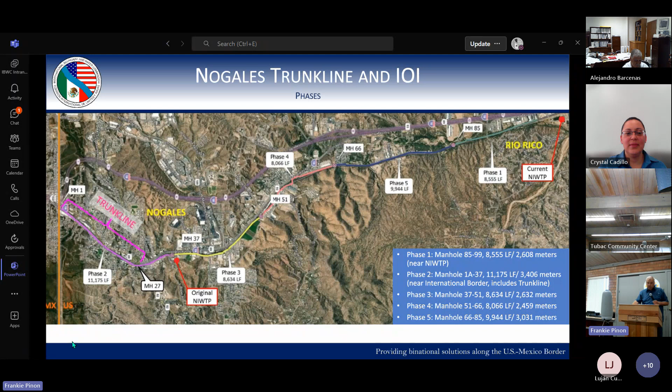We have several presentations tonight. The first presentation will be given by Mrs. Crystal Cadillo, a civil engineer with our Construction Management Division, and she's going to be doing a presentation on the International Outfall Interceptor. The next person is going to be myself, and I'm going to be doing a presentation on the Nogales Field Office, specifically the Nogales International Wastewater Treatment Plant updates. Our third presenter is Mr. Rangel, Associate Director with North American Development Bank, doing a presentation on updates and status of the Estadio Pump Station. After that, we will have public comment, co-chair comments, and future agenda items.

So with that, I would like to kick it off with Ms. Crystal Cadillo with her presentation. Good afternoon, everyone. So I will be presenting on the completion of the International Outfall Interceptor, IOI, as we all know. Next slide, Frankie.

As you all remember, you've heard me say this many times before, you've heard this presentation. So we know that the IOI is a 9-mile long sewer line. It carries transboundary flows from Nogales, Sonora, and Nogales and Rio Rico in Arizona. The line itself is considered 2 segments: a certain portion, 1.5 miles near the border from manhole 1 to 27, is considered the international trunk line. And then the remainder, 7.3 miles to the plant, is considered the IOI.

It was built in 1971 and is currently near the end of its service life. A study conducted in 2005 identified significant pipeline issues and deterioration. An additional challenge is that much of the pipeline lies underneath the Nogales Wash Channel or the Potrero Creek. So a contract was issued to rehab and extend the service life of the pipeline, and it was extremely critical in order to reduce the risk of sewage spills from possible collapsed portions of that pipe.

We had incidents where that did occur, so we're trying to extend the life of the pipe. It's also very important to preserve this pipeline because it roughly provides about 12 million gallons per day of treated water that contributes to the Santa Cruz River Basin. That water is used for drinking, ranching, farming, and other activities critical to Arizona, and it also sustains habitat critical to migratory species.

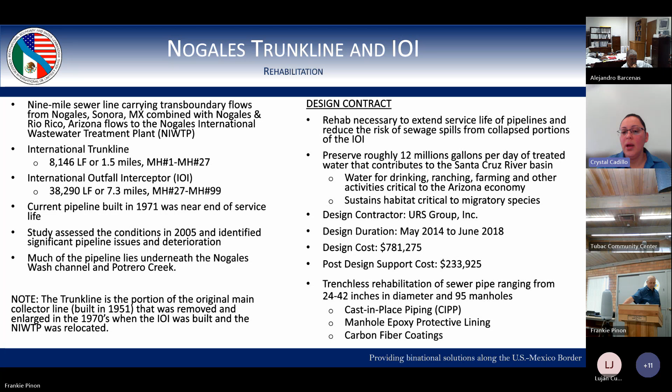The methods selected for the sewer pipeline, between 24 to 42 inches in diameter, used a technology called cast-in-place piping. For the 95 manholes, 2 methods were selected: manhole epoxy protective lining, which was the primary method, and carbon fiber coatings, which were used more for structural rehabilitation. Next slide.

So this diagram shows you the phasing of the project. Due to funding at that time, we could not award a contract for the entire portion of the project. So the project was divided into 5 phases, roughly around 8 to 9,000 linear feet, with the exception of phase 2, which was closer to the border, at about 11,000 linear feet.

In general, here you'll see the different phases. They were prioritized by the condition of the pipe. Phase 1 was considered the worst condition, so that was from manhole 85 to the plant. Then phase 2 started back at the border, and it just kept progressing to 3, 4, and 5, moving up from the border as far as the condition.

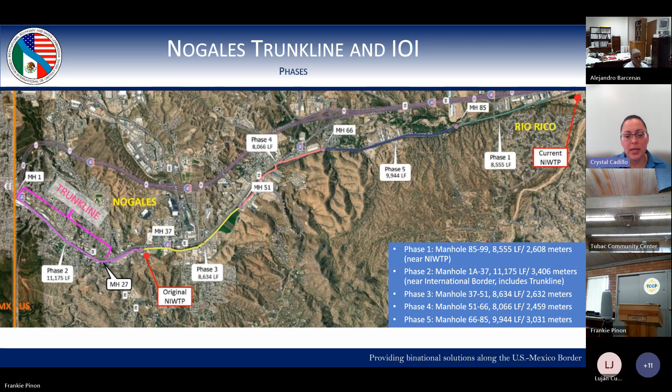So the project was issued in 2 contracts. The first contract was about 5.3 miles of piping and 56 manholes, and it also included some wash repairs at manholes 86 and 93 in order to protect the IOI. The contractor for this one was SAK Construction, and the construction management contractor was CDM Smith.

The project started back in April 2022, and a little bit over a year later, in August 2023, the project was completed. The total cost of this project, including the construction management, was $16.7 million.

Just to give you the progression of the project, they started with the wash repairs, and then finished phase 1 first in August, phase 3 in December, and by May of the following year, 2023, they had finished phase 2.

In 2022, we awarded the second contract, which was the remainder of the project, or the remainder of the phases. It covered 3.4 miles of piping and 38 manholes. It was also awarded to SAK Construction, and the construction manager on this one was Arcadis.

The construction award again was September 2022. Construction started in August 2023, and almost a year later, substantial completion was completed on June 2024. That cost was $17.6 million.

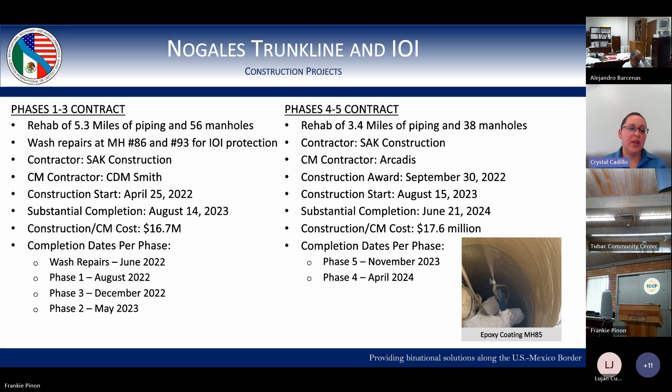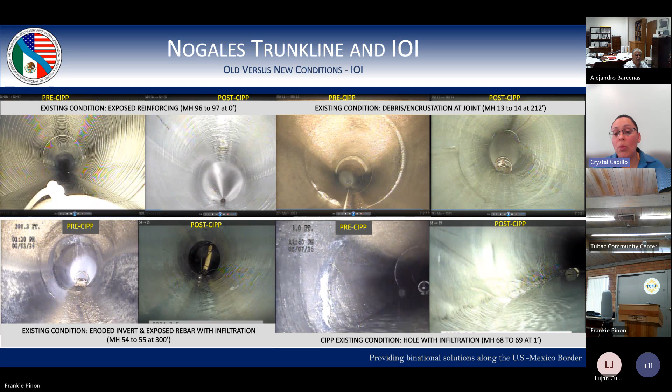Then the last set here, between manhole 68 and 69 - it's a little difficult to see, but there was some infiltration you can observe there, a hole. Afterwards, when the CIPP was completed, you can see that's been taken care of. So just to show you some of the conditions between the old and the new pipeline. Next picture, next slide, Frankie.

Now, ownership of the IOI - I'm sure you're all very interested in that. On the ownership transfer, we have a couple things that happened between last year and this year. The first item was the Nogales Wastewater Improvement Act of 2023 was finalized, which provided us the authority to then take ownership of that pipeline. Also, after negotiations, the city of Nogales, along with IBWC, signed an intergovernmental agreement to transfer the IOI on the 11th of April this year.

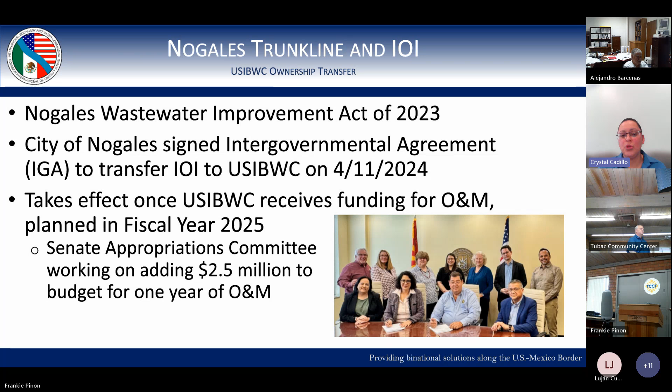So both the agreement and the act, ownership takes effect once USIBWC receives the funding for the O&M, and that's planned to occur in fiscal year 2025. Currently, we were informed that the Senate Appropriations Committee is working on adding $2.5 million to our budget for one year of O&M.

Some highlights of the agreement, to show what's required between us and the city. For us, the IOI becomes federal property, and all of the IOI city easements get transferred to USIBWC. We take care of 100% of the operation and maintenance of the pipe and manholes, including conducting annual inspections, regularly scheduled cleaning, and repairing the IOI as needed. We also review and approve permit requests for anything added into the IOI after this point, and we inspect and approve any new lateral connections.

For the city, some of the requirements in the agreement were that they are guaranteed their sewage capacity of 4.84 million gallons per day. They'll also be providing us details of all the contributing laterals to the IOI. They will continue to maintain laterals connected to the IOI, including the one from Rio Rico. They will continue to notify USIBWC of sewer overflows in the IOI, and provide assistance to us when we have to make IOI repairs. In the event of new connections contributing to the IOI, they will be submitting permit applications to IBWC.

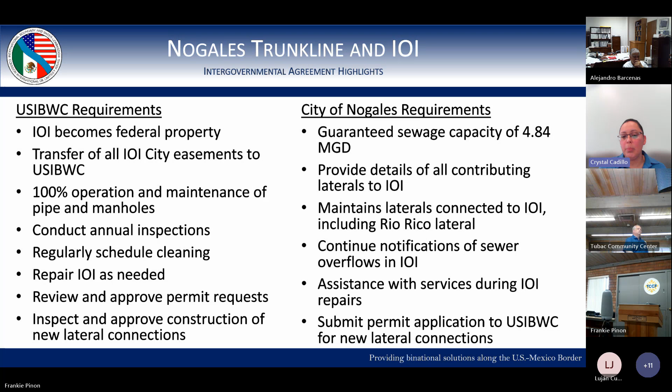Some of our needs at this point - it's been decided with our Nogales field office that we will be outsourcing the operation and maintenance, contracted services to maintain that IOI. We also have additional capital projects required, including purchasing equipment for IBWC to perform those inspection activities. We would like to install additional flow meters and telemetry to monitor the lateral flows, install locking manholes and sewage overflow detectors for protection of the IOI, and construct a new operator building and equipment shed for all that additional capital and equipment required for maintenance and operation.

Some additional ownership requirements - the act's legislation also included construction and operation and maintenance of a debris screen. As some of you may be familiar, we have damage in the pipe due to a lot of debris, different kinds of debris, as well as illegal activity. So this is definitely something we want to add to the IOI for protection.

Some of our preliminary plans are that multiple screens will be required for redundancy, as well as to capture all of the items that are anticipated to be coming in. Our proposed location is as close to the border as possible, in order to maintain protection for as much of the trunk line in the IOI as possible. This project will require significant coordination. Here you can see a very simplified version of a debris screen, but the intent is to capture any debris that gets into the trunk line.

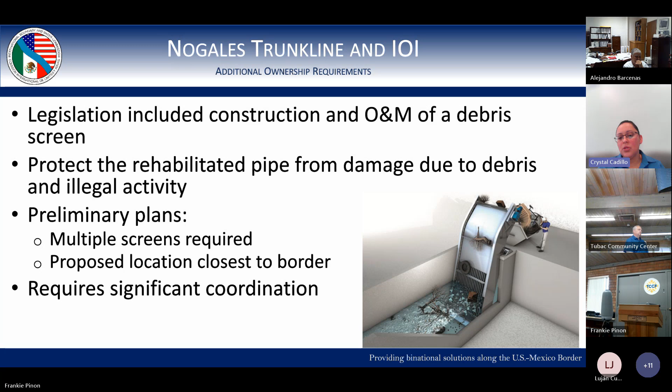That will conclude my presentation. Are there any questions? Yeah, we got one question, Crystal.

This is Bruce Bracker. Do we have proposed locations for these debris screens? We do not, other than closest to the border, around Robbins I think. But that's a very complicated spot - there's a lot going on there, including the tunnel and the railroad. So it's going to be a challenge to find the right spot for those debris screens, because it's going to be multiple, and we're going to need room for additional items, such as dumpsters to pick up the items, and access in and out. But that's what we have proposed at the moment.

This is Bill. Regarding the notification of overflows, would that also include, hopefully not, ruptures and leaks or anything else, or just overflow? I think I can take that, Crystal.

There's technologies out there, used throughout the United States and other countries, that will give you pre-warning of potential overflows. So if there's something blocking the line that will eventually completely obstruct it and cause an overflow, it gives you a pre-notice so you can get crews on the way out there to find out what the issue is. We're hoping these technologies should minimize the amount of overflows, if at all possible. There are different reasons for overflows - pluggages, excess flows, things of that nature - but if we could minimize the frequency, that's what we're looking for.

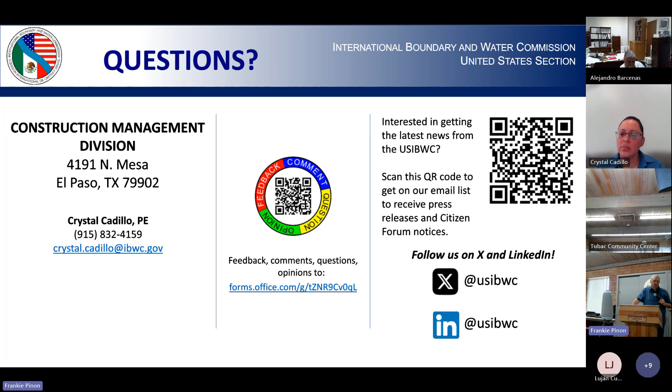Yeah, that's going to be a contracted O&M. So the O&M is going to be contracted O&M. Some of that money is for some of those items, not the entirety, but for some of those items. So even though the operations and maintenance of the pipeline is going to be contracted, USIBWC still has other responsibilities and other things we plan on doing with the pipeline. So it depends how much the contract, how cheaply we get the contract for. We don't anticipate the contract being $2.5 million, but there are starting fees for the first year, et cetera - mobilization fees and things of that nature. So the first year is usually the most expensive and it goes down from there.

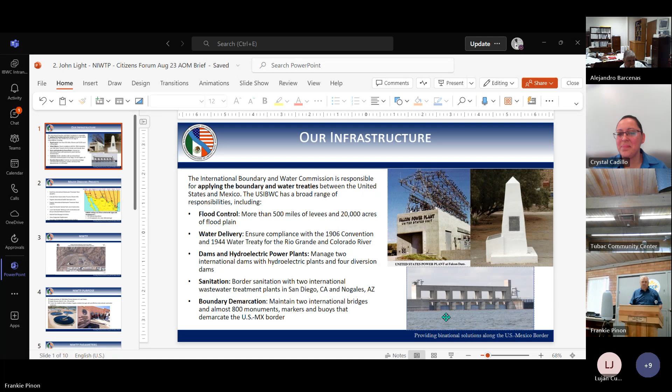So the second speaker is myself. Again, my name is John Light. I'm the Area Operations Manager for USIBWC, Nogales Field Office. I'm going to give a presentation that starts at the 30,000 foot level with USIBWC, and then narrow it down to our local field office and some of the things we're planning to do with the Nogales International Wastewater Treatment Plant. I'm going to step to one side here so I can read the presentation, since my eyes aren't as good as they used to be.

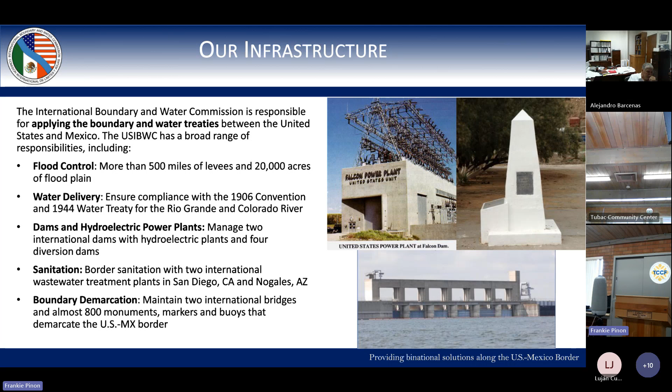The International Boundary and Water Commission is responsible for applying the boundary and water treaties between the United States and Mexico. USIBWC has a broad range of responsibilities, including flood control - we have more than 500 miles of levees and 20,000 acres of floodplain. Water delivery - we ensure compliance with the 1906 Convention and 1944 Water Treaty for the Rio Grande and Colorado River. We have dams and hydroelectric power plants - we manage 2 international dams with hydroelectric plants and 4 diversion dams. Sanitation - we have 2 international wastewater treatment plants in San Diego and Nogales, Arizona. And we have boundary demarcation - we maintain 2 international bridges and almost 800 monuments, markers, and buoys that demarcate the U.S.-Mexico border. Next slide, please.

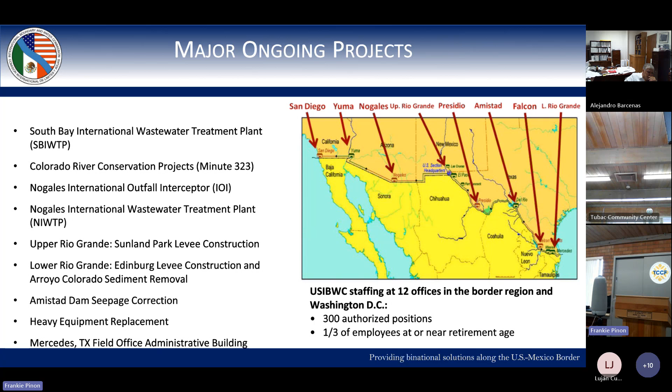We have the Mercedes Texas Field Office. We do all this with less than 300 employees total, all the way from Brownsville, Texas, to San Diego, California. And as noted, one-third of our employees are near retirement age, so they're all in my ballpark, about one-third of us.

So here's an overview of the Nogales treatment plant. You can see the upper blue line is the Santa Cruz River, and the blue line that goes to the right, down on the lower right, that's Nogales Wash Potrero Creek. You can see the convergence is just east of the treatment plant, goes to Santa Cruz and goes down.

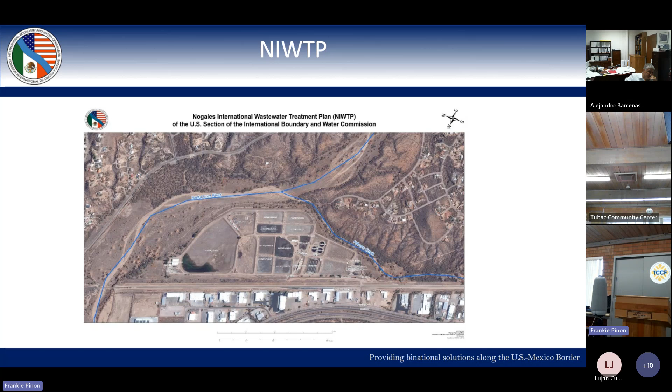So for much of the year, the effluent from the Nogales treatment plant is actually the headwaters of the Santa Cruz in this area. There's usually no flow prior, except during the wet season.

So what's the purpose of the Nogales International Wastewater Treatment Plant? It's to apply provisions of the 1944 Water Treaty between the United States and Mexico, which gives sanitation priority, and to apply Minutes 206, 227, 261, 276, and 294. Minutes, or sub-agreements to the actual treaty.

They're interpretations of treaty language between the two countries that were signed and clarify things in the 1944 treaty. And it's to protect the health and safety of Ambos Nogales residents through safe and effective international wastewater treatment. That's the purpose, that's why it's here.

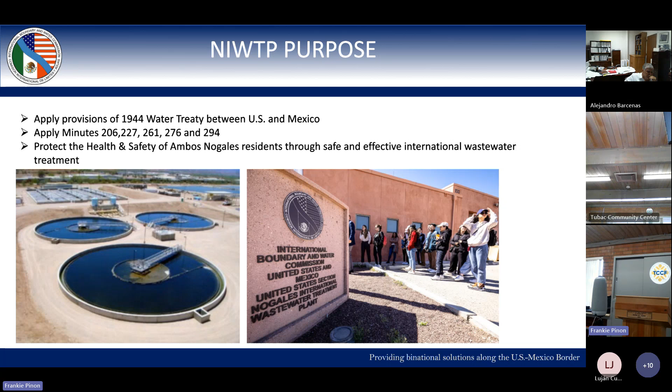Here are our parameters. 80% of our inflow flows originate in Nogales, Sonora, Mexico. The remainder is United States contribution. Water is treated to United States Clean Water Act standards and federal and state discharge requirements. Influent from Mexico is conveyed to the NIWTP through a 9-mile International Outfall Interceptor, which is what Crystal just gave her presentation about. Our treatment capacity is 14.74 million gallons per day.

The treatment plant is routinely well above capacity, ranging from 100 to 120%, resulting in no system redundancy ability. So what that means is that everything we have is running full blast all the time in order to keep up. We don't have any reserve capacity. We don't have reserve components.

The treatment plant was upgraded in 2009 to what they call a biological nutrient removal facility. So what we do is remove nutrients. If we discharge nutrients—if any of you were around prior to this upgrade, the Santa Cruz River looked like pea soup because of all the nutrients in there, algae, things of that nature. So what our treatment process does now is remove those biologically before they're discharged into the river.

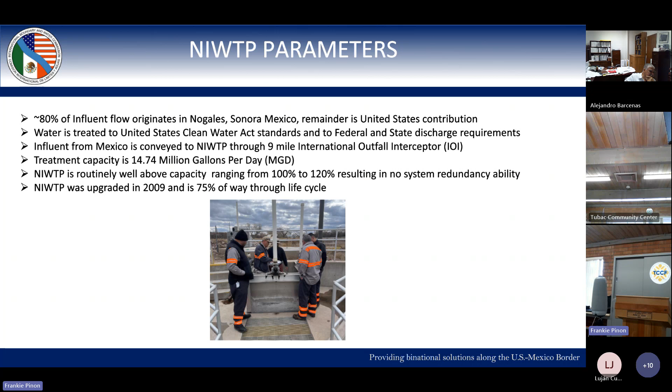And it's 75% of its way through its life cycle. Treatment plants are usually designed to last 20 years. Technology changes, equipment wears, especially when it's running at 100 to 120% of capacity all the time.

USIBWC contracted for a wastewater treatment plant capital improvement plan, CIP. The contractor will perform a wastewater treatment asset management plan, AMP, including the Nogales treatment plant and the San Diego treatment plant, starting in August of 2024, this month. The AMP will include an updated 5-year capital improvement plan and a projection of long-term renewal and replacement funding needs.

Prior to this, our agency really didn't have anything like this, so it was piecemeal on our capital plan, and it was hard to get funding, et cetera. So Commissioner Giner and our executive staff decided that we need to go this route in order to have professional capital plans that we can show Congress and our other representatives exactly what they need and why we need it, and be able to prove it with data.

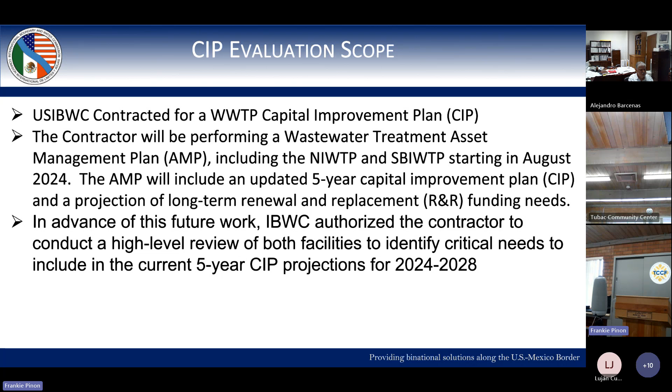In advance of this future work, IBWC authorized the contractor to conduct a high-level review of both facilities to identify critical needs, to include the current 5-year CIP projections for '24 through '28.

This one's a little bit harder to read. The treatment plant is an advanced wastewater treatment facility with the following design capacity: treatment plant capacity is 14.7 million gallons per day, hydraulic capacity of 34 million gallons. It was originally constructed in 1970, with upgrades in 1990 and 2009.

Major process facilities include headworks and settling basins, screening, grit removal, odor control, biological treatment with 3 bioreactors, aeration blowers, glycerin feed systems, final clarifiers with 3 tanks and return sludge pumping, final effluent with 5 traveling bridge filters and ultraviolet disinfection, biosolids with drum thickeners, aerobic digester, lagoon belt presses, polymer feed, support facilities, electrical distribution, backup generators, SCADA system, buildings, roads, and levees.

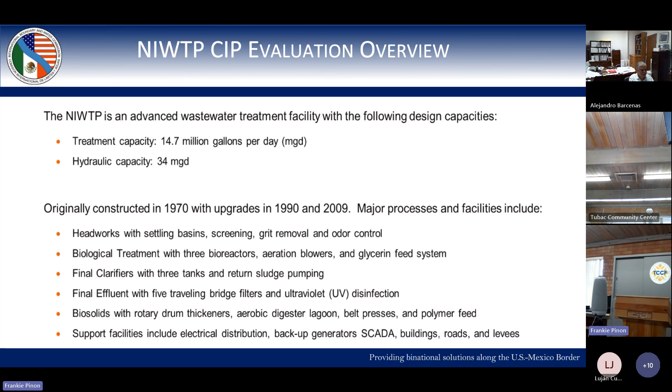So this is more for people who are really taking deep dives into the wastewater side, but I can explain any of this if anybody has any questions later.

The Nogales treatment plant consistently operates between 16 and 18 million gallons per day, about 20% above treatment capacity. The treatment process lacks redundancy, making the plant vulnerable to critical equipment failures and process upsets. Tanks and equipment cannot be taken out of service for proper maintenance.

As I said, we're at 100% or greater capacity all the time, so all systems are online. We cannot take a system offline in order to do proper preventative maintenance on it. We just have to run it, basically run until fail.

Wet weather flows routinely exceed 34 million gallons per day, our hydraulic capacity. The headworks become overwhelmed, resulting in debris accumulating in downstream processes, which impacts performance and damages equipment.

The solids handling processes are inadequate for new requirements to haul dewatered sludge to a remote landfill in Tucson, currently resulting in high transport and disposal costs of up to $3 million annually. So a large portion of our annual operating budget goes to just transporting biosolids to Tucson.

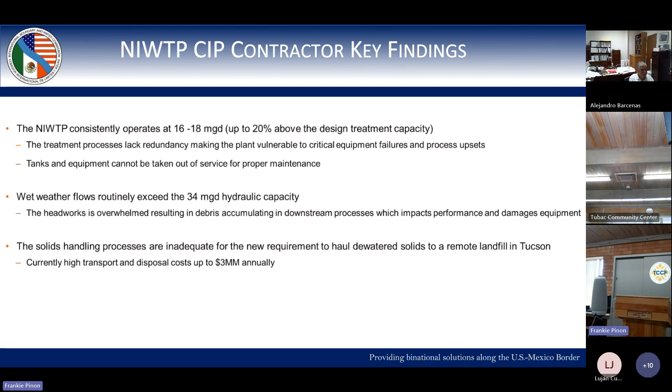So this is what our contractor, when they did their quick analysis, made some immediate recommendations. One is to complete an engineering alternatives analysis study, basically having an engineering firm completely look over the whole system and make recommendations to us.

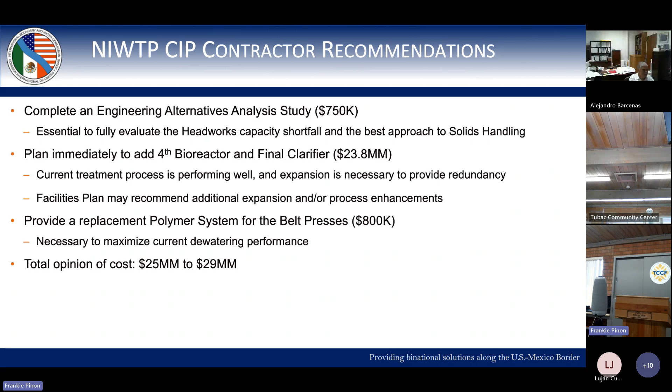They also recommended planning immediately to add a 4th bioreactor and a final clarifier. This would not add to our treatment capacity. What it would do is allow us to take our current process offline, at least one train, and do maintenance on it while another train handles the capacity that train was treating. They also recommended providing a replacement polymer system. We're looking at a total opinion of $25 to $29 million with the repayment.

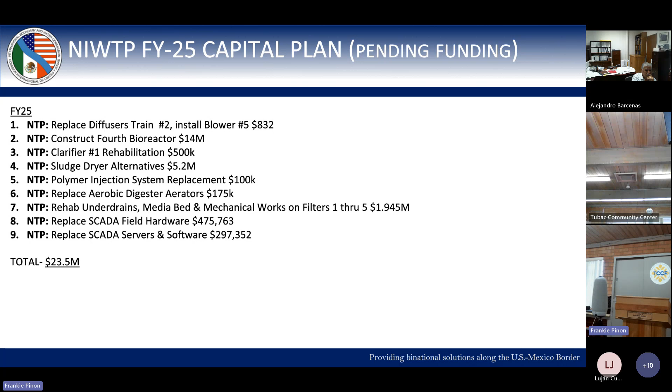And that's about it for my presentation. So any questions?

Bruce? I just keep my hand up.

Who's doing the outreach on this 23.5 million that you need? I know that you briefed, that you came to a board briefing with the federal delegation in Tucson. Beyond that, how does the community help IBWC?

So since we're a federal agency, we cannot directly lobby Congress or our representatives, and we cannot encourage people to do so, but we can inform you of our situation.

As Bruce knows, we've informed, I think it was 7 out of 11 of the congressional delegations for Arizona, of almost this exact same presentation that I gave a couple of months ago. I briefed the Port Authority on what it is. So this is your community.

We're here, we're part of it, I'm part of it as well. So if you believe these are worthwhile things that you want to see, then please express that to your elected representatives. I can't ask you to do that, but that's the way our system of government is set up to work. I think that's about the most I can say.

Thank you, John. I had a question because somewhere in your presentation you mentioned 34 million gallons per day. What was that? That's the hydraulic capacity. If it was just pure water coming through the treatment plant, that's what we could handle before our systems would be overwhelmed and overflowing. The treatment capacity is the amount of flow that can come into the plant and be treated to our discharge permit standards, up to that amount. But at 34 million gallons per day hydraulic, we can't treat that.

And the cost of the improvements in place was about 34 million total? I don't have that figure, Crystal would have that. I don't know. 16.7. About 34 million, so yeah, roughly. So we're looking at a total of about $1 million for every million gallons per day.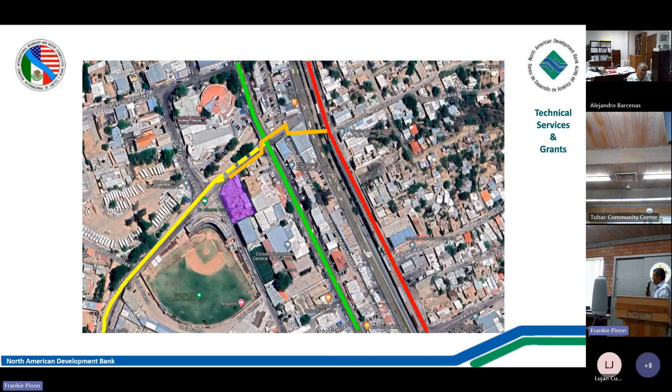I'm going to mention now what it is that we have to do at the lift station. I discussed why the lift station and siphon are so important, and now I'll explain what we've been doing at the lift station. Next slide, please.

We've been working with the utility in 3 phases. All these funds we've been investing come from EPA. The first phase concluded in 2023, and we focused on a few things. You see in the picture where that person is standing, that's a grit chamber.

As John mentioned, the treatment plant has been receiving a lot of solids, sand, and so on. In Mexico they have the same problem, and it was also affecting their pumps. So one of the things we did is build infrastructure to retain some of those solids in the chamber and protect the pumps. In the picture there's a crane used to take out all the debris, and if you look to the left, that's where the pumps are. This chamber is before those pumps, and the idea is to protect them.

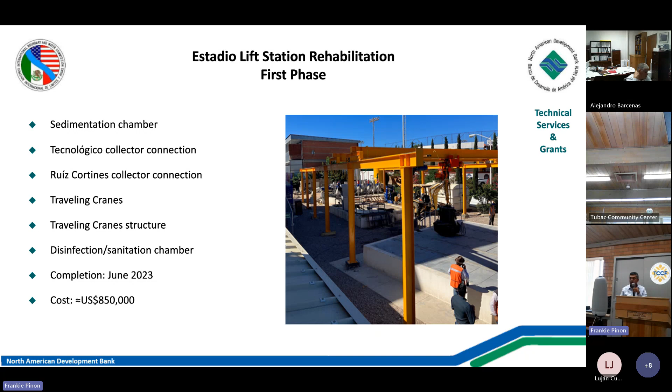We know they've been using this facility now, so that's an important thing. We also built traveling cranes so they can clean the chamber and, if needed, replace or rehabilitate any of the pipe pumps. The investment there was about $850,000. So that phase has been completed.

If we could go to the next slide, please, the second phase. The second phase has also been completed. This was more of an electromechanical phase where we wanted to automate the 5 pumps and make sure they have control of operating those pumps, so that if there's excessive flow or lower flow volume, they can manage that and always comply with the needs. These works have been completed.

The only issue is that after completing this phase with the new software and hardware, the pumps and some of the infrastructure they have there—the piping, electrical wires, and so on—are very old. So there was a disconnection between these new systems and their old pumps and electrical system. That's a problem we're facing. Right now we know they are only using one of the 5 pumps.

They would only need to use 2 pumps at this time if they had enough water to comply with the minimums, but we want all 5 pumps to be working. Of course, they're not all going to be working at the same time—they'll work in phases. That's important so you can protect the equipment and get maintenance done. So this second phase has been completed, again with funding from EPA, and we are now moving on to the third phase.

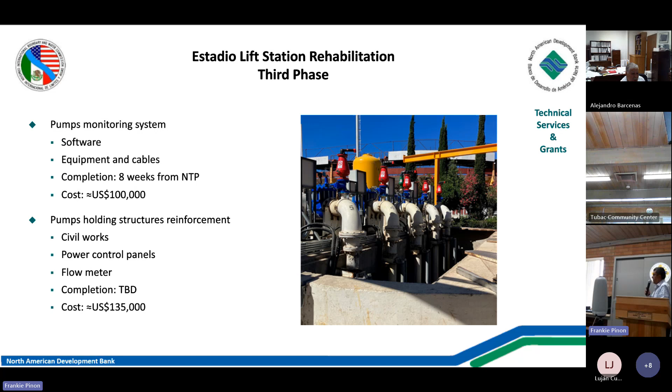One more? Yeah, I'll let you know. The one with the colors. One more. Yeah, that one.

How does this relate to the groundwater basins from which this water is being extracted? Because in the long term, to be sustainable, you want the groundwater extracted from each basin to be returned to the same basin. Correct. So, and I haven't done myself a lot of research on that, but let me tell you what we know. Most of the groundwater that Nogales, Mexico is extracting is coming from the south of the city, towards where the Los Alisos Wastewater treatment plant is, on the Bambuto River, which flows south from the city.

So they are very interested in getting more water into their treatment plant and then disposing of that water on the Bambuto River so that they can recharge their local aquifer. They know that now they are extracting more water than the aquifer is receiving, so it's not sustainable. So yeah, there's interest at the city and at local level to look into that.

Do you know how that would relate to the 9.9? Hopefully that's kind of in the balance there. To be honest, I do not know. I know that, as I said, there's over extraction there. But we'll have to look into the numbers and see, we know that's gonna help, but I don't know particularly if that will be a solution where the aquifer will be sustainable or not. Because it's been decades, right?

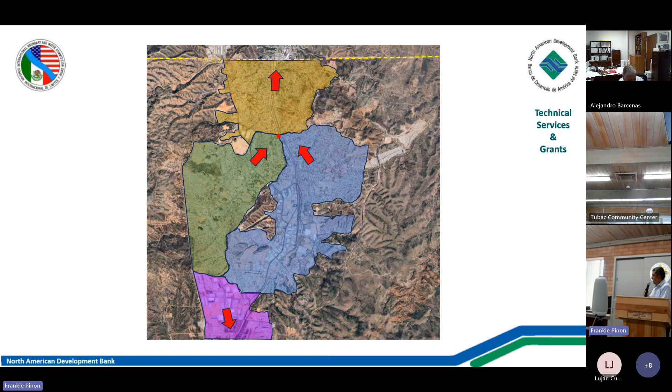Okay, so let's go to the next slide, please. So I can just tell you kind of like averages from last year. Of course, every day it's different. But what happens is that the Tecnológico collector can only send up to, like I said, 1.6, 1.7 MGDs, that's what's generated in that area. When you have peaks here on the US side of 3 to 4 MGDs over the 9.9 that's the agreement, some of that comes from the Tecnológico, but the rest comes from the rest of the city, basically the Ruiz Cortines collector.

They haven't been able to divert wastewater from the Ruiz Cortines into the lift station because the siphon is clogged. So the only thing I can say, Alejandro, is that right now, if they would like to send more than 1.6 or 1.7 MGDs back to Los Alisos, they will not be able to do that because the Ruiz Cortines is not sending any wastewater to the lift station. They need to unclog that line, and that will allow them to send flows back into Mexico.

Now, I'm just going to guess here. If you're mentioning that sometimes, even without sending water from the Ruiz Cortines, Mexico is complying with the 9.9 MGDs, my guess is that perhaps some of the flows you receive on the IOI is not only wastewater, but also stormwater, a combination of stormwater and wastewater. That's why during the monsoon season, we see an increase in the water that goes into the IOI, but that's just my guess.

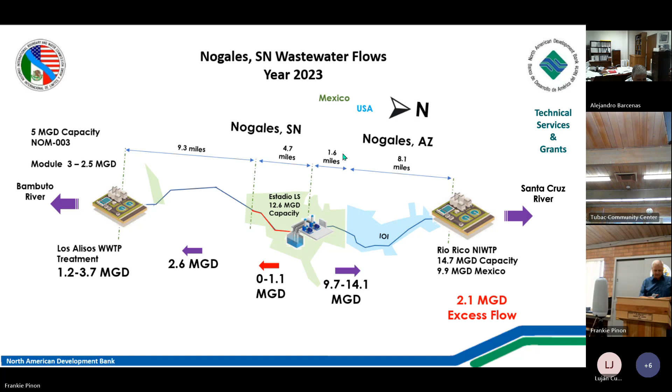Sir. I don't know, I think Bruce will have to tell us about the study.